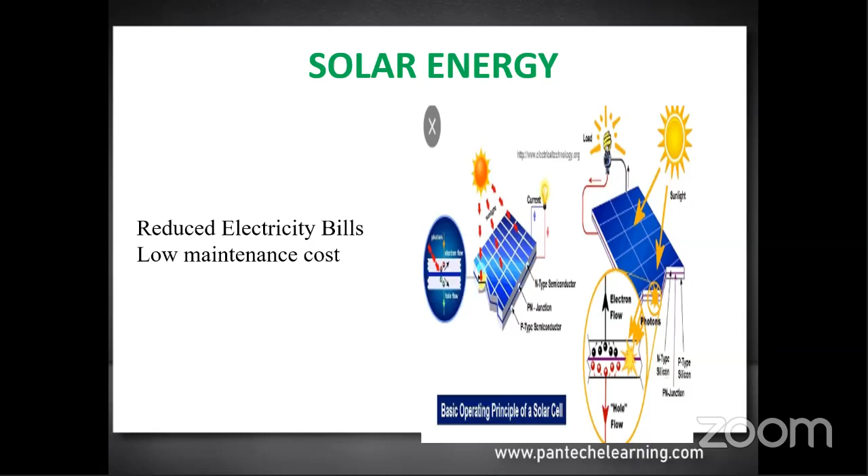So in solar energy, mainly two types are there: one is centralized grid connected PV system, and another is decentralized grid connected PV system. So what is centralized PV system and what is decentralized PV system?

Centralized PV system means, suppose in a big thermal power plant we are generating an 800 megawatt power plant. If you observe RTPP, Rayalaseema Thermal Power Plant in Kadapa - near Proddatur we have one RTPP, and Vijayawada also has one thermal power plant, right? We generate 200 or 300 megawatt power from that power plant.

Like that, when you generate a huge amount of power, like a 100 megawatt power plant in a big solar park - if you consider near Visakhapatnam, we also have one big solar park. And in Kurnool district, 3 years back, a 1000 megawatt solar PV plant was already proposed.

In India recently, the Prime Minister of India started a big 750 megawatt solar PV park in Madhya Pradesh recently. So like that, in a big solar park...

How we create this solar park - we can take 1000 acres or 100 acres. In that 100 acres, we put the solar PV panels in series and parallel, connecting them to create a big solar park, and from that solar park we can generate solar power.

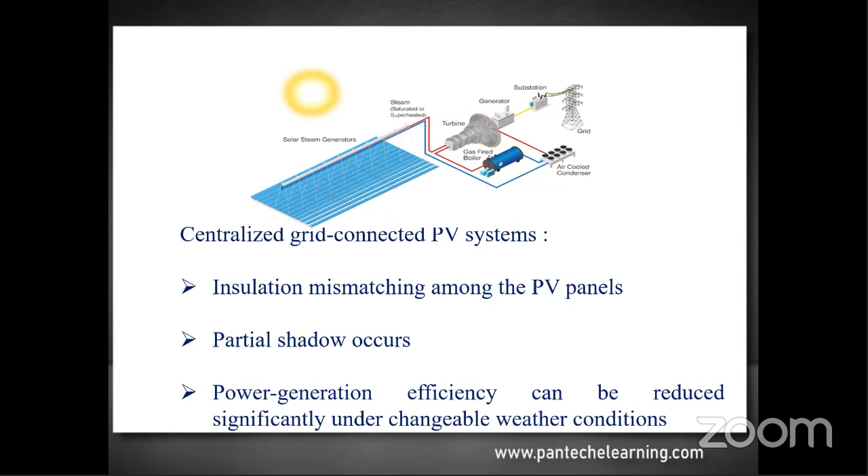When you create a big solar park, due to these problems - insulation mismatching problem, shadow problem, or weather conditions - the efficiency you get at the load side from the solar PV plant will be reduced. So then how to overcome those problems?

The solution is we need to prepare a decentralized PV system. That means you people know how much power you are utilizing. In Rajam, on top of our college also, how much energy we are consuming per month, we will know, right? Whether we are utilizing 10 kilowatt of power or 15 kilowatt of power, we will know, according to the estimation of power, how much we are utilizing per month.

So by taking those estimations, we can install a 10 kilowatt solar PV system on top of our college, meaning we no need to depend upon the grid side people. Where we are taking the power supply near to the substation only, whether our college or our home, we are taking the power supply, right?

So then, when you are connecting like this, when you are taking the power supply from the substation, in this case you no need to depend upon the grid side people. So here what will happen, you need to prefer the decentralized system like this.

The Andhra government is also preferring this, right? We no need to focus on the centralized capital; we are shifting to the decentralized capital, right? So in the centralized system, we face some problems - voltage problem, shadow problem - and the efficiency we get is very less.

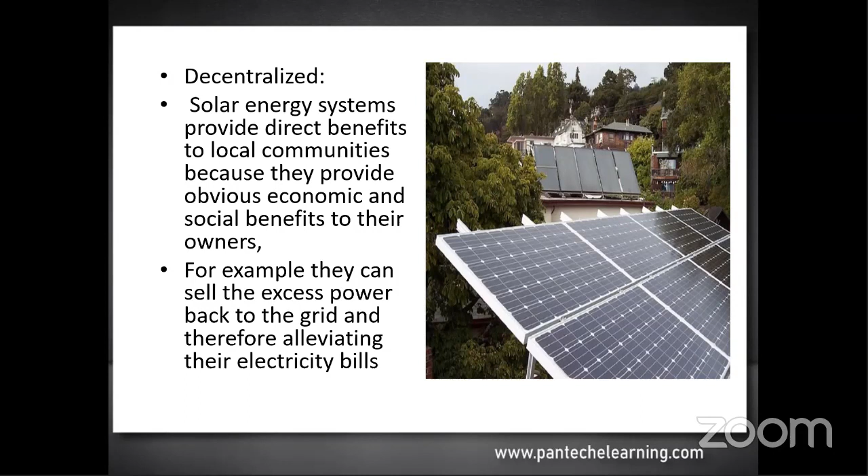So all the loads at your home, by using a 3 kilowatt panel, you are utilizing all the loads, and this power you are getting from sunlight only. Automatically, what will happen is it will reduce the electricity bill, right? If you consider when we were in lockdown for 3 months, after that the electricity bill became very huge, right? So they are changing the tariff plans and increasing the electricity bill.

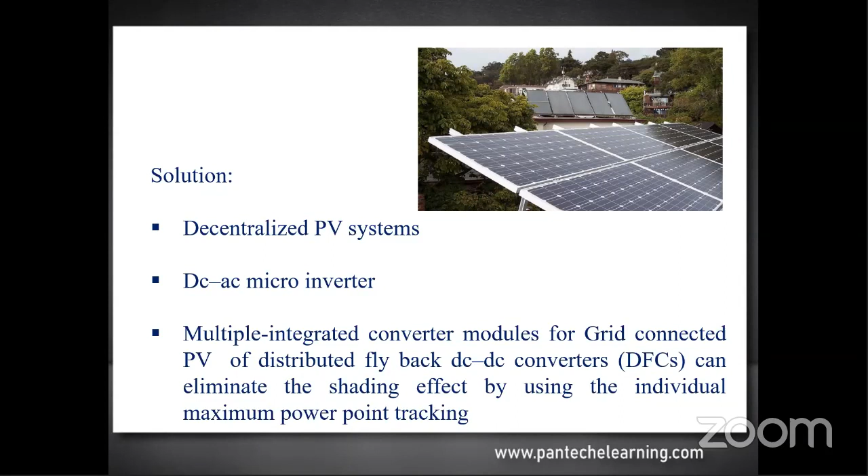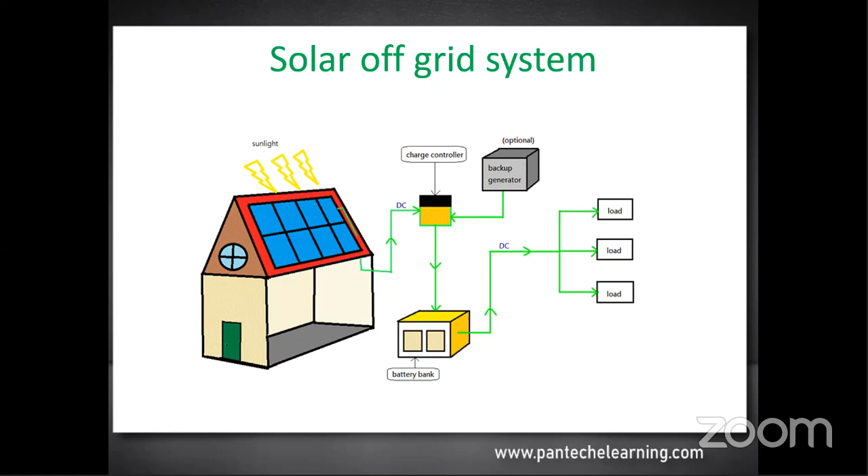Why we are calling this an off-grid system is because we are generating the power, and the excess power we are storing in the battery only. We are storing the energy in the battery. When you are combinedly using two energy sources, you can call it a hybrid system. So when you are preferring solar and wind, two energy sources, it is called a hybrid system.

So if you are preferring the grid tied system, as I said previously, when you are generating 360 units of power per month, per day how much units will you get? 12 units you will get, right? We can't utilize all the loads at a time. So one day we can utilize 8 units of power, another day 6 units of power. When you have excess power, you can give it to the grid side people.

That means the distribution side people will pay the electricity bill to you according to the unit cost. In India, the rural cost is different from the urban area cost. In Visakhapatnam, the unit cost may be different, and in rural areas like Rajam and surrounding areas, the unit cost may be different, around 3 rupees. In Visakhapatnam, the unit cost may be 9 rupees or 7 rupees they will purchase. So depending upon the location, the cost of power will also be different.

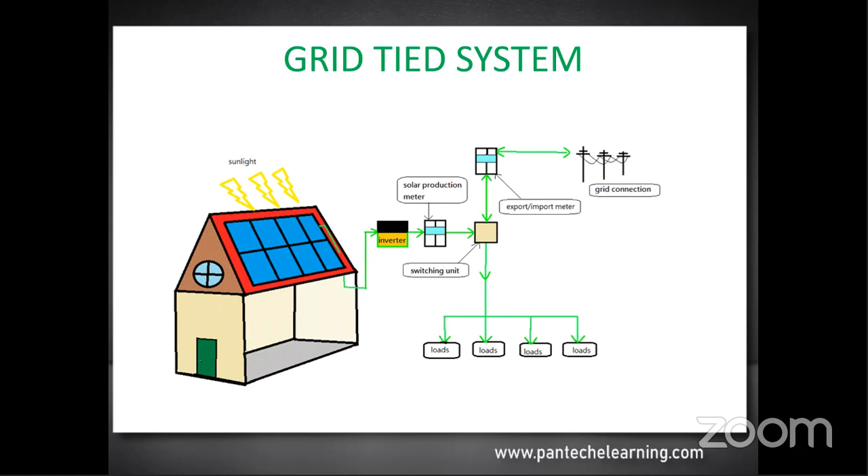Voltage and reactive power control, and power quality, mainly power quality, and some fault ride-through capability. So when we are transmitting the power, due to the heavy rainy season, due to lightning strikes, or trees falling down on the transmission network, automatically some faults will occur. So those faults we need to clear automatically.

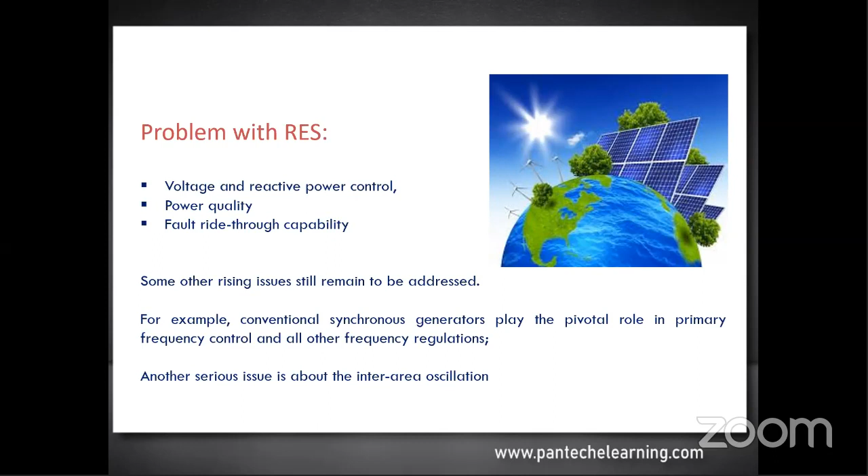We need to clear them, then distribute the power clearly, and then we need to satisfy the customer mainly. So how can we overcome these problems? How to design this solar PV system in MATLAB. So we are discussing some problems, whether it is a power quality problem, voltage mismatching problem, or any fault ride-through capability problem.

When we face these many problems while installing the solar PV system, the temperature from morning to evening is different, right? So we will get different types of voltage. If you are giving different voltages to your load side, people will not be satisfied. Definitely they won't take power from you next time. So we need to satisfy the customer. We need to give quality power to the load side.

Suppose every day we are getting continuous power supply. If the power supply is not continuous, people will feel annoyed. Automatically we will get some hesitation toward the grid side people, and we can hardly speak up. So we need to give quality power supply and continuous power supply also, that is the main thing. So how to give continuous power supply to overcome all these problems? Here, MPPT comes in.

What is MPPT? Maximum Power Point Tracking. When we are installing the solar PV system on top of our home, we need to go with the MPPT algorithm. This is nothing but the charge controller. Whatever the weather conditions, whatever the atmospheric conditions, by implementing the maximum power point tracking algorithm, we can tackle it so that at a particular point only we will get the maximum power. From that point only, we need to track the PV power.

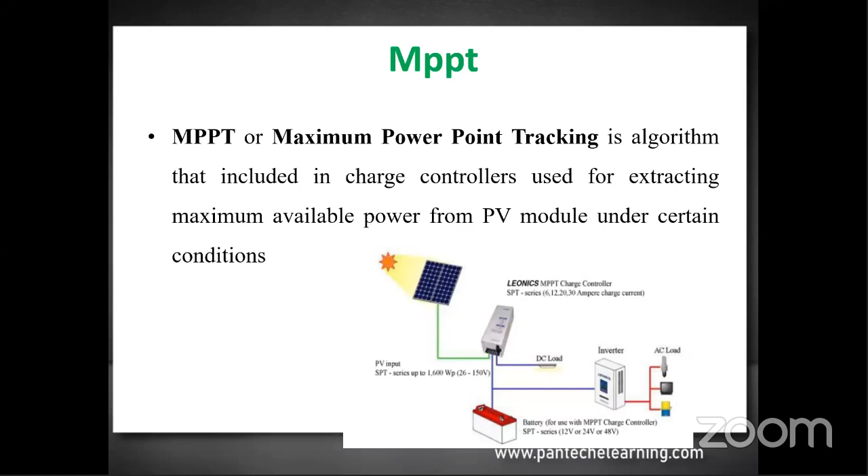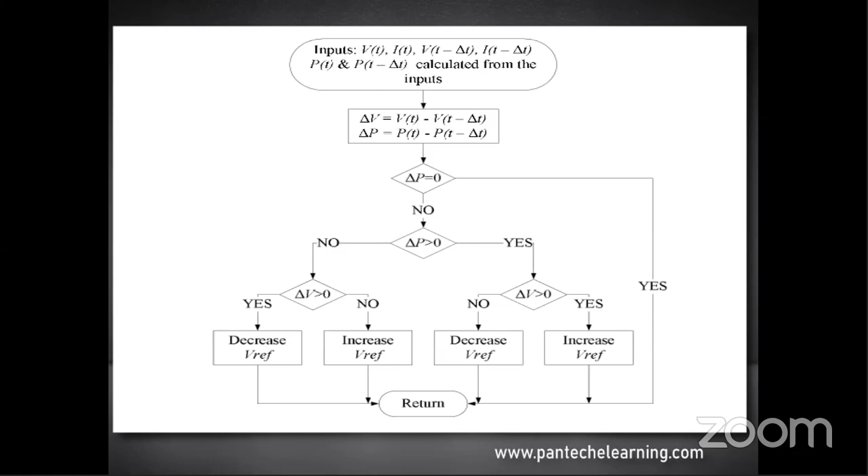So here is the basic MPPT algorithm, you can see here. The temperature automatically, minute to minute, may be different, right? So according to this MPPT algorithm flow chart, we can tackle and track the maximum power. So where can we utilize this, how to design these things? The best platform among all the industry people is MATLAB.

MATLAB is not only for physics area, it has some good features. In the MATLAB domain, we can design the physical model of a solar PV system. This physical model, it is not a programming language—you need to remember MATLAB is not a programming language, it is a matrix laboratory. If we are strong in mathematical analysis, we can design all our models in the Simulink design also.

Cleve Moler developed MATLAB, especially for engineering and research scientists, for their purpose only it was introduced. Before MATLAB, we had Fortran language, and C++ and C languages. For technical people and scientists to understand these, it was so much difficult, they faced so many problems. So MATLAB was introduced, and by analyzing all the mathematical problems, we can solve our problem here.

In the MATLAB domain, we mainly have four steps: one is model in the loop, another is software in the loop, another is processor in the loop, and another is hardware in the loop. So we have mainly these steps. Here we need to design the physical model first.

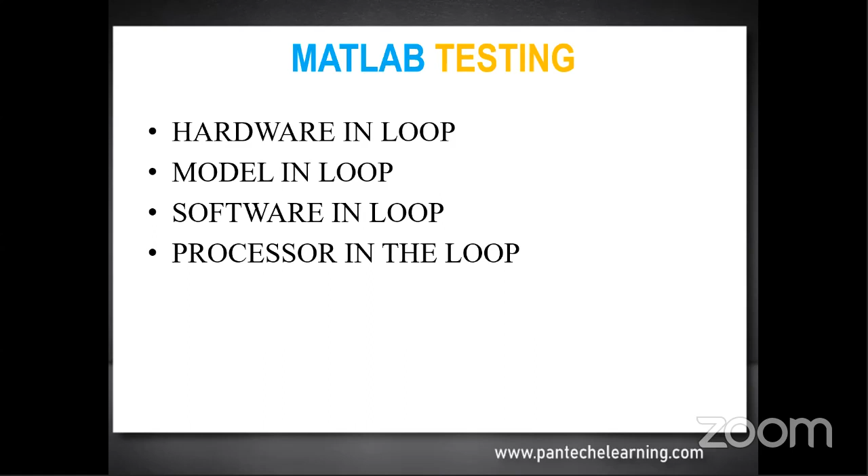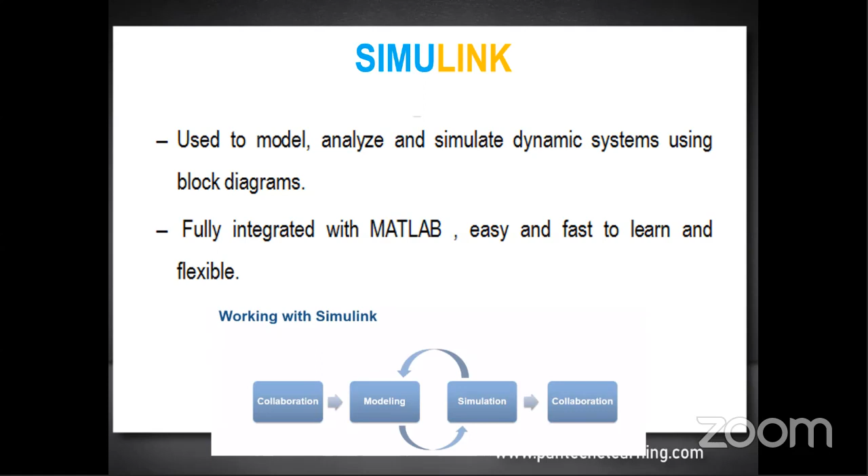And these are the models. So here, how to design a physical model in Simulink and Simscape. By using Simulink and Simscape, we need to implement this to analyze a dynamic system. This Simulink is the best tool for that. And here, model in the loop we can test, and how many test cases also we can write in the model in the loop.

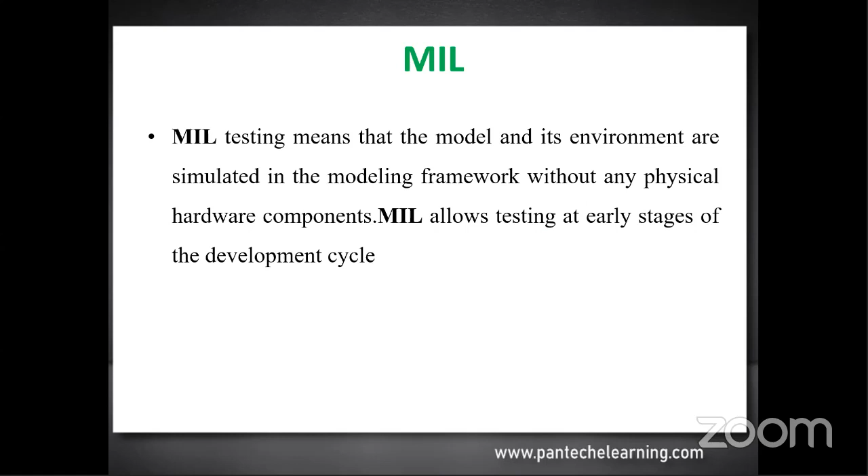Here I will show the MATLAB. I am using the 2016A MATLAB version only.

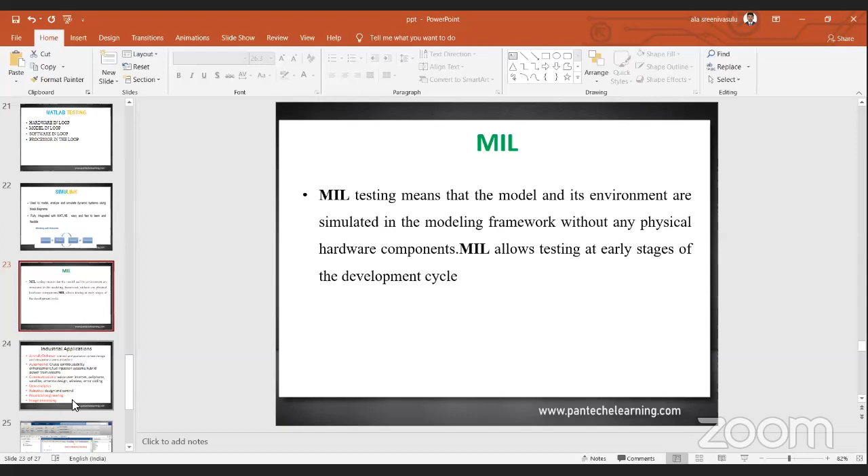Not only for solar PV systems, we can utilize this MATLAB in industrial areas, aircraft or defense or automotive industry, communication, data analytics, financial engineering, image processing, and robotics also. And here I will show the MATLAB domain.

You can observe here. You can see here, this is the MATLAB command window. So in this MATLAB command window, whatever variables you are typing here, all the variables will appear in the workspace.

Here I will show a simple model. Normally, the variable name, how much we can give here, whatever the variable is. Suppose if you are typing in this command window, if you are typing A is equal to any matrix, you can type here.

A is equal to 1, 2, 3, semicolon, 4, 5, 6. Then you can enter here. So whatever variables you are typing in the command window, it will appear in the workspace here.

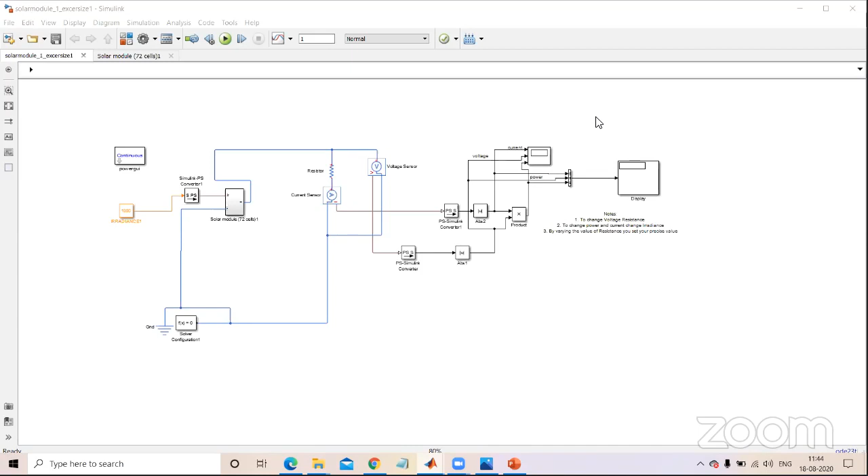So in this MATLAB Simulink, we will see a basic model. This is a solar module exercise where I connected 72 cells in the solar PV module. We will see how to connect the cells in a series manner. This is the solar module PV system.

I will show each cell. Inside, we created one subsystem. What does subsystem mean? To reduce the space in this MATLAB window, we created the subsystem. You can see here.

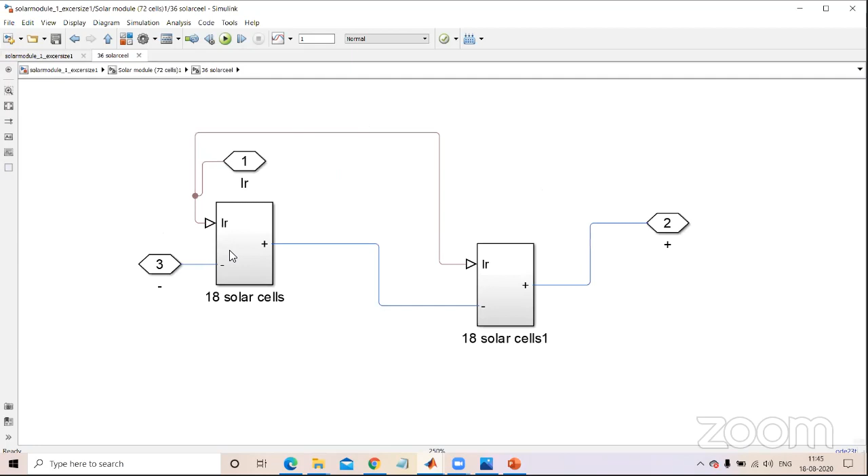If you are observing here, we connected a number of cells - how many? 1, 2, 3, 4, 5, 6 solar cells we connected.

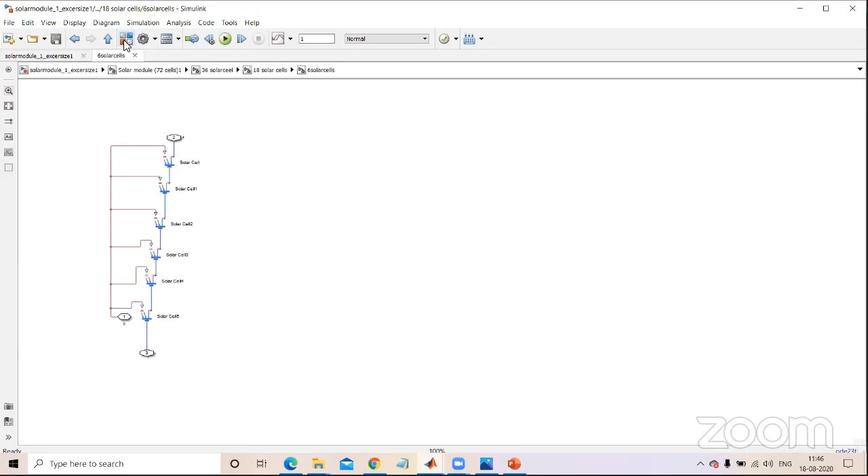Where can we get these solar cells? From the library. This is the library browser, and in it we have different toolboxes - in MATLAB, more than 100 toolboxes are there. We can implement this solar PV system by using Simulink and Simscape, and we can implement this solar module PV system also.

This is the library browser. These are the commonly used blocks - continuous, dashboard, and different types of blocks are there. From Simscape, you can get the solar PV system. Otherwise, if you know the name solar cell, we have a search box here - you can type 'solar cell' here.

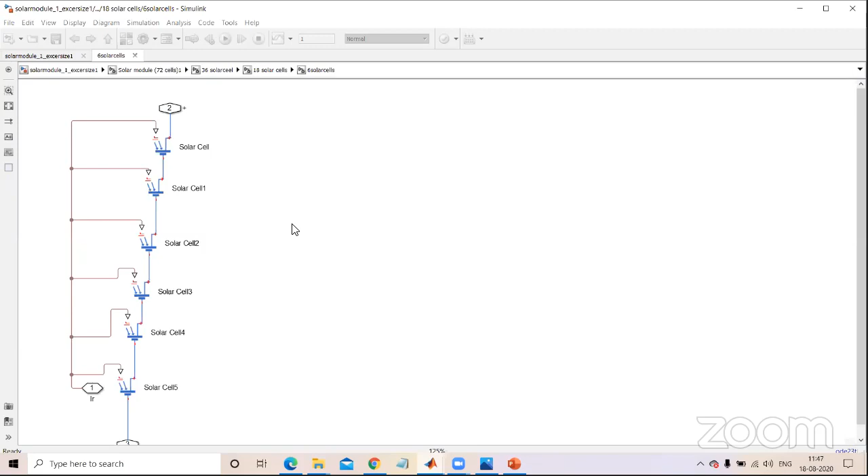You can see here, this is a solar cell. To add it to our model, just right click and add to block in your solar module model. By connecting the module, you can see we added the solar module PV cell - from the library we are taking this solar cell.

If you observe this solar cell, how many terminals are there? 3 terminals - one is the positive terminal, one is the negative terminal, and one is the irradiation block. This triangular shape is the irradiation block, because in real time we don't know how much irradiation or temperature we are getting from the sun's power.

So here in the Simulink software tool, we need to give the irradiation temperature, whether it is 1000 irradiation temperature, or 800 irradiation temperature, or 500 irradiation temperature. Different types of irradiation temperatures we can give here.

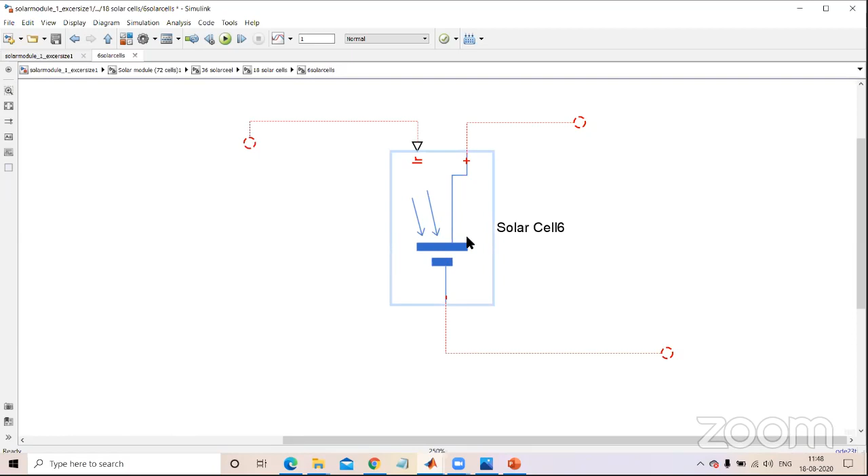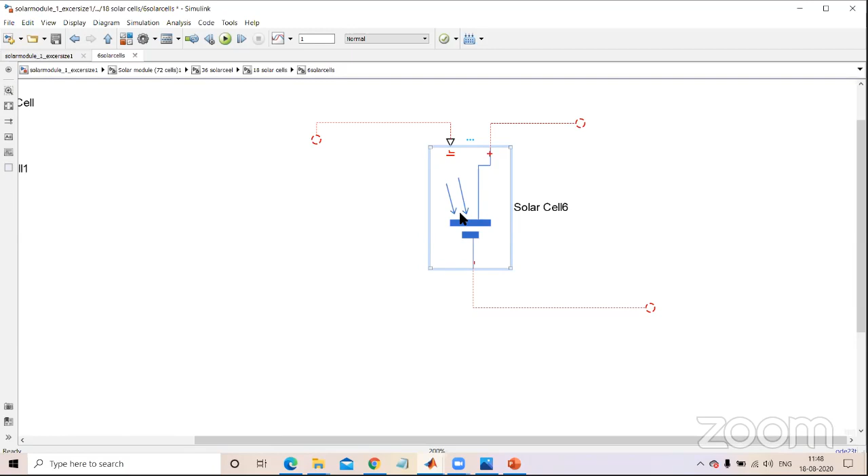So here, this is a physical block. This is a Simulink physical block only. In this physical block, if you are observing, this block is also MathWorks providing. If you double click in this solar PV cell, in each cell we have only 0.6 voltage.

So here Matlab library browser, we have 0.6 solar cell at 1000 irradiation temperature. So then we know, right, how much wattage of the panel we need to implement. So if you are observing this block solar cell parameters, if you observe here.

You can see here, what is the short circuit current they given? 7.34 they given. And the open circuit voltage they given here, 0.6 open circuit voltage they given. And the irradiation temperature they given here, 1000 irradiation temperature they given.

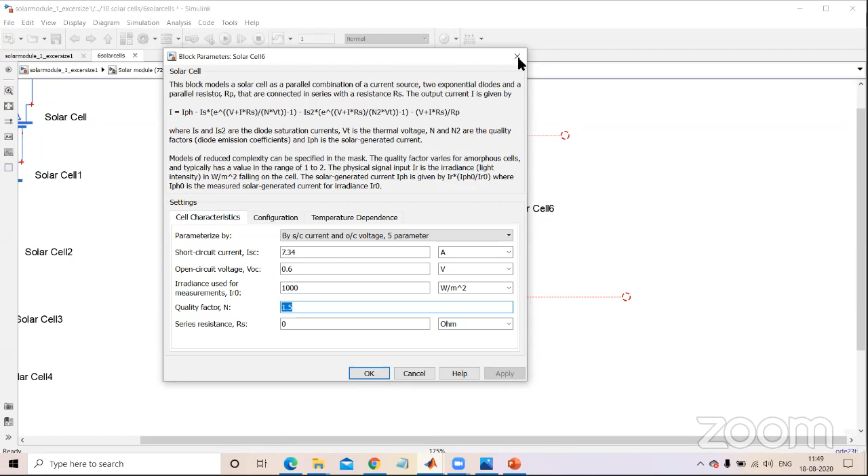And the quality factor here, 1.5 they given, right? So here this block is providing by the MathWorks. So from the library browser we can take, right? So here, like this cell only we are taking, but here, how much each cell, you can observe here, in this cell.

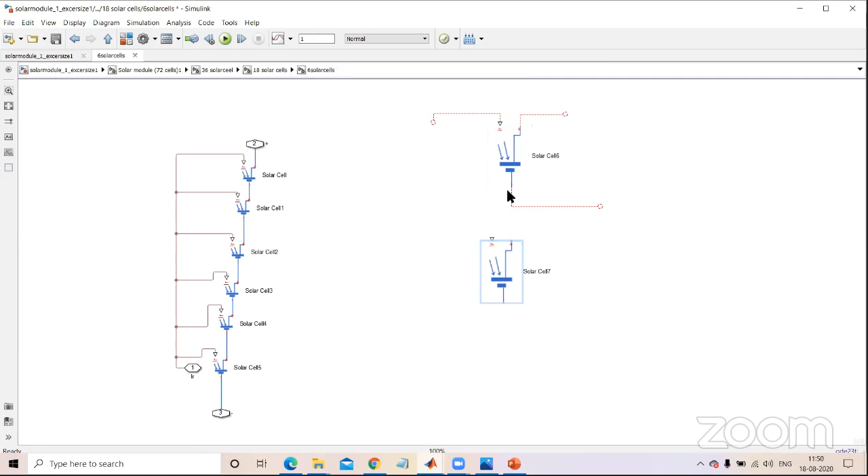So how to connect the series means, you can observe here, I will show here. So here, just once if you take the one solar cell means, so then you can take here another solar cell. So here, by taking the solar cell, series connection means how we need to connect. So positive, negative I connected.

And here again, so why here I am connecting number of solar cells in series means, to improve the voltage levels. So when we have one panel, one cell, here it is giving 0.6 only. When we need to improve, when we need to connect the number of cells in series manner only, we can improve the voltage levels, right? So by connecting a number of cells in series manner, we can improve the voltage level.

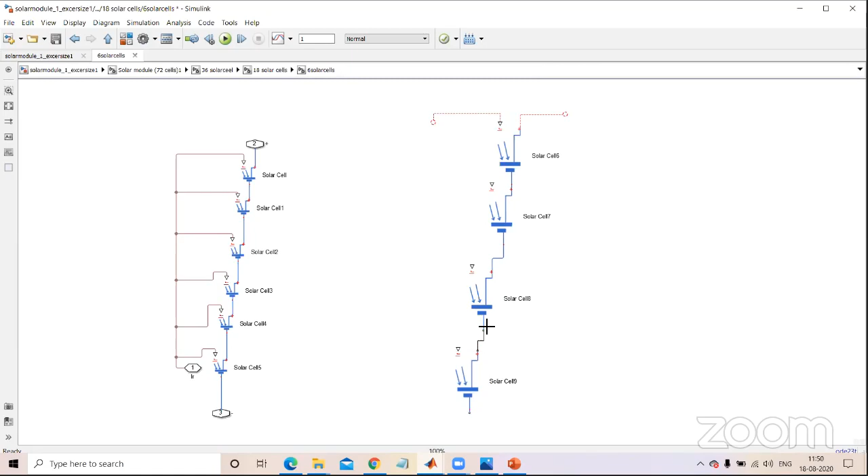So here, all the cells here, what I am doing here, by connecting the series manner, so here positive, negative, I connected. So here the space it is occupying, right? More space it is occupying, right?

So here like this, when it happened means, you can select all these blocks. You can select all these blocks like this. So then just right click here. On the Simulink software, you can just right click. Once you need to select all these 4 solar cells, you can right click here.

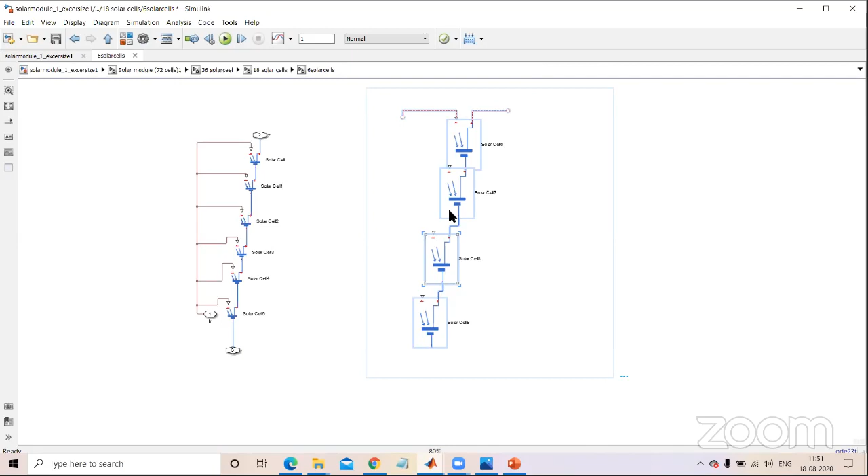Once if you right click here means, you will get one pop-up here. You will get one pop-up. Here it is showing like this, right? So cut or copy or delete or create subsystem from the selection.

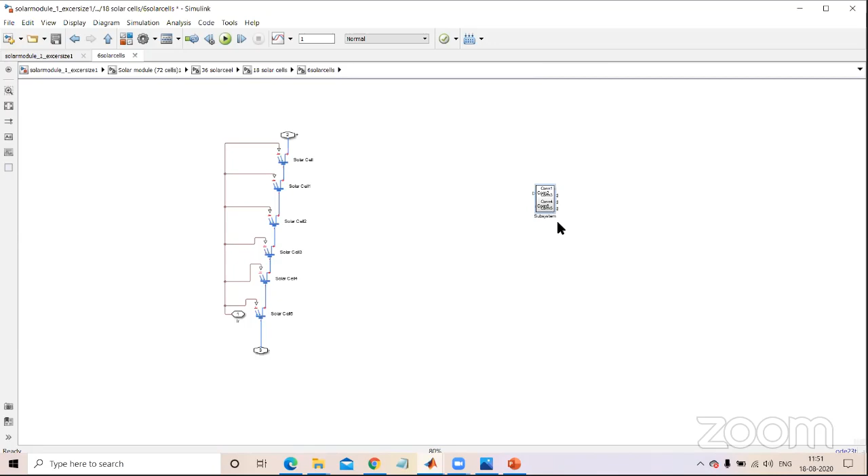That means Control G you can put here. So here we are creating the Control G. That means the space, it will be reduced very less, right? You can observe here, space is reducing. So here, the number of ports here, it is more, right?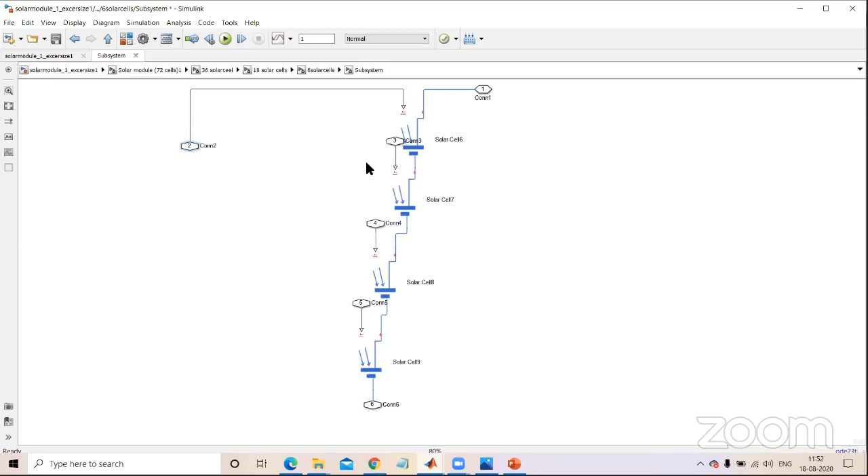So how to connect here? So inside of the subsystem, this connection port 2, this is the connection port 2, right? So what is this one? In the solar PV model, 4 cells we connected, right? So for understanding purpose, I am telling.

So this is, we need to give the name IRR, or you can give the name irradiance. Irradiance, you can give the name. So this input port, you can give the name irradiance. Second one. And here, this third one is there, right?

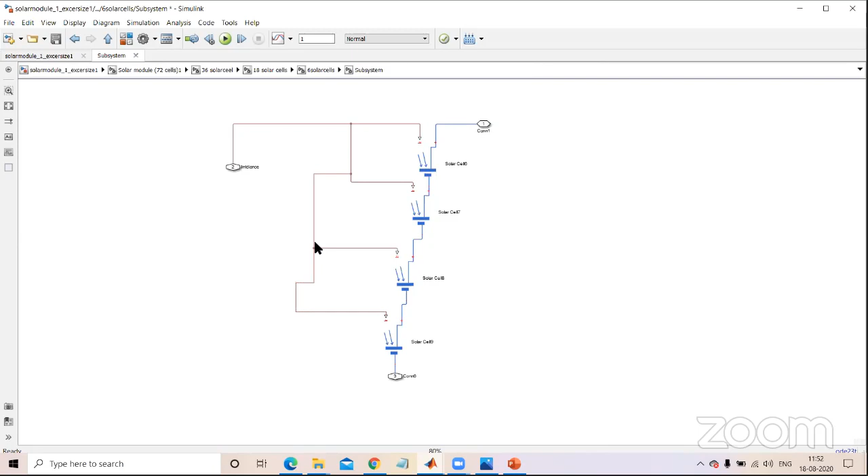You can remove this one and you just give this connection to here. You just give the connection to here. You can observe here. You can connect here and you can remove this one. You can connect here. And this one is the positive terminal. This is the positive terminal. This is positive.

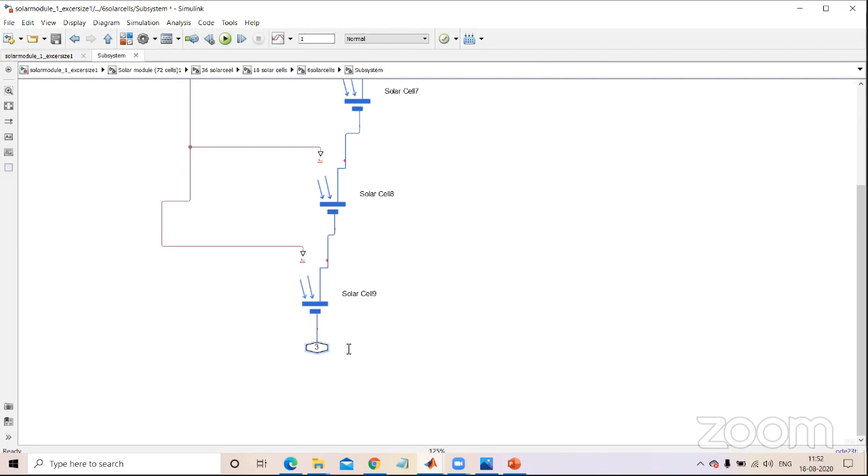Negative. This is negative. Negatives, right? So if you come back here, it is reducing, right? So we have three ports only. One is irradiance and one is the positive terminal and another one is the negative terminal, right?

So here like this, we connected here. How many cells we connected here? Number of cells we connected here. 6 solar cells we connected. This is for understanding purpose. You can observe here. How many solar cells are there? Each cell here, you can observe here.

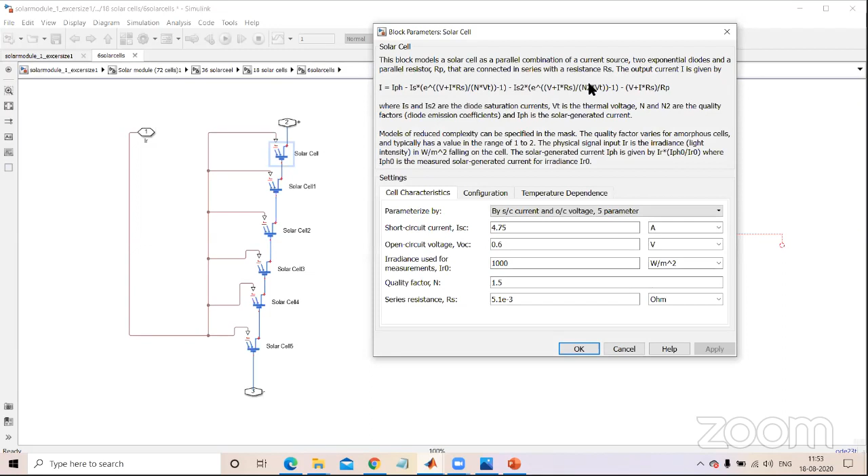So here in this solar cell, we connected the series resistance we given. We need to transmit the power, right? We are converting the photovoltaic energy into electricity we are converting. So here the series resistance is 5.1 e power minus 3. And here each cell it will give 0.6 voltage. And what is the short circuit current?

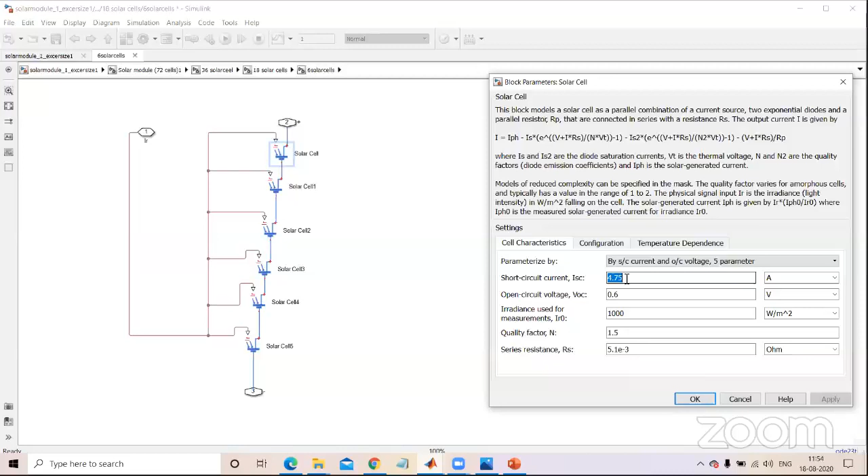4.75 only we are, that means current is 4 amps. And the voltage, one cell will give 0.6 voltage only. So how many cells did we connect? Total number of cells, 6 cells we connected.

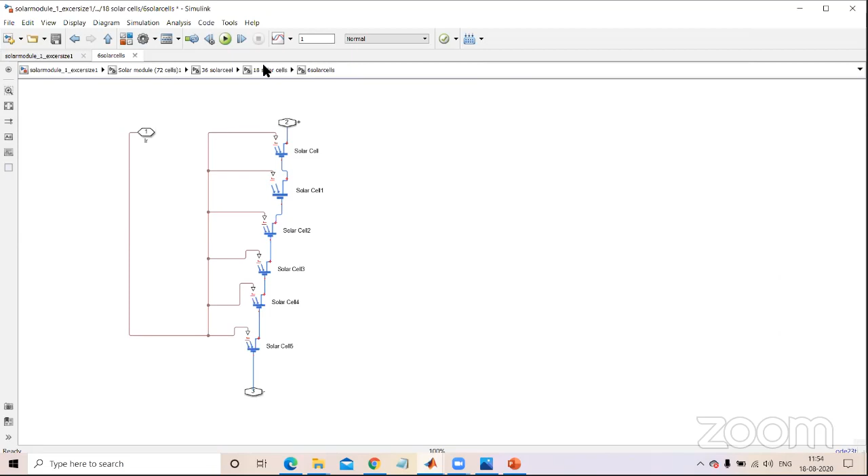By connecting the cells, we created one subsystem here. So I am removing this one. By connecting this series connection, I created a subsystem. Again, these solar cells, this is the irradiation, this is the negative terminal, and this one is the positive terminal. So this is one solar PV module, right?

So like this, I connected 3 more solar cells. From here you can drag here. So again, this is 6 solar cells and this one is 6 solar cells. Total cells, how many? 18 cells it will come, right? Again here we connected in series manner only, positive to negative we connected. And here this is the positive, and this irradiation block we connected to here.

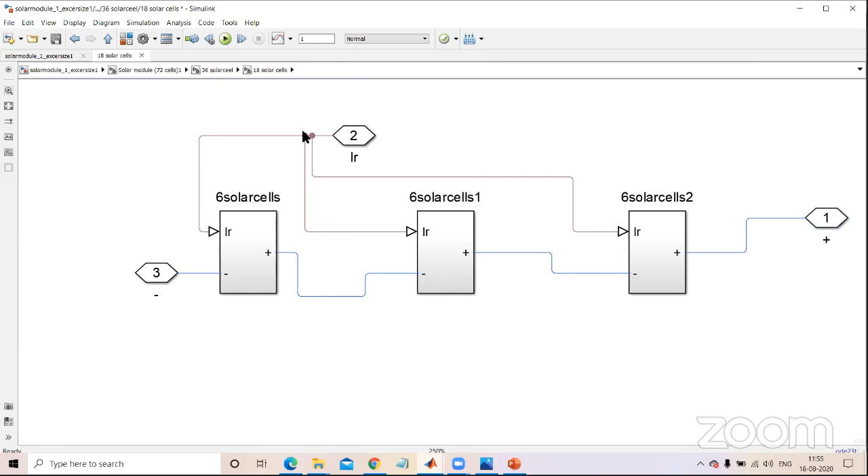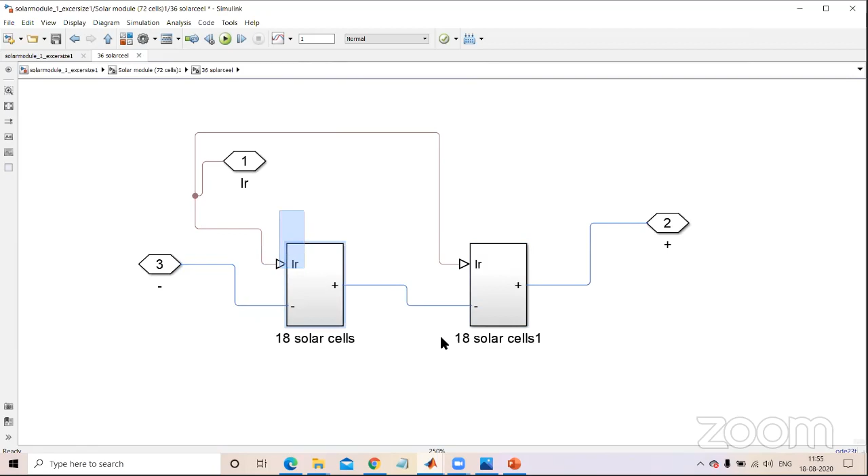So if you observe these cells, how many are connected in series? 18 cells are connected in series, but 6 solar cells is one module, one solar PV module. Like that, here again, 18 solar cells and 18 solar cells, we connected 2 such groups. Totally how many cells will we get? 36 cells we connected, right?

So then here you can see 36 solar cells and 36 solar cells, we are taking 2 different solar cell groups. We are taking totally 72 cells for one solar PV module. How many cells do we have? This is one total solar PV module which has 72 cells inside.

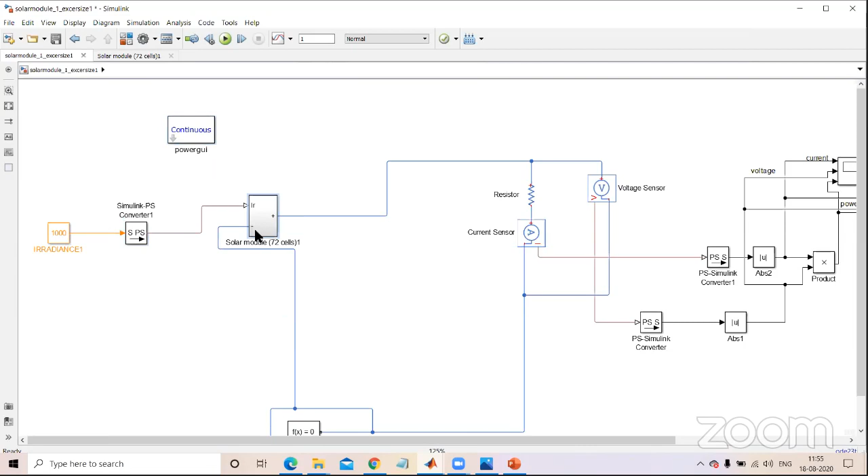If you observe our mobile battery, in the mobile battery also we have a number of cells. So according to the cells connected, the battery capacity may be different. Here we connected one cell of 0.6, and like that we connected 72 cells, with a resistance of 5.15 e power minus 3, a very low resistance.

So after this we need to give the irradiation block, right? So again, from the library we are taking the Simulink to physical converter from the utilities. From the utilities, we have one Simulink to physical converter, and physical to Simulink converter. Why are we connecting the Simulink to physical converter? Because this constant block, if you observe here, this is a constant block, right?

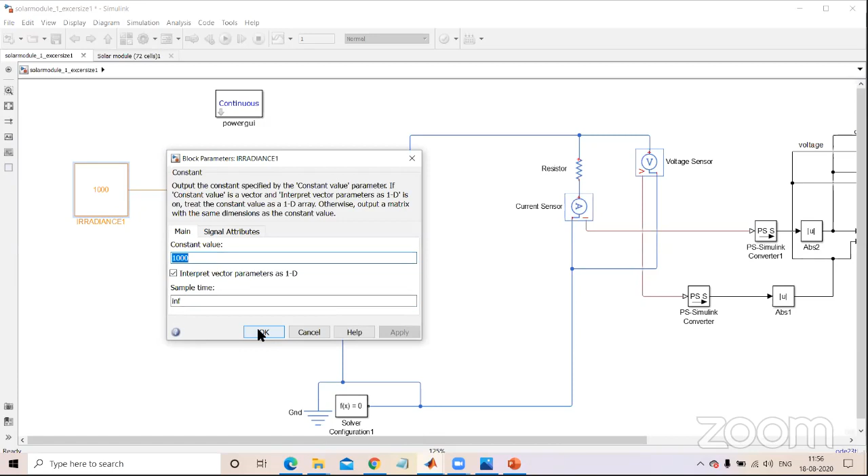In this constant block, how much irradiation temperature did I give? 1000 irradiation temperature I gave. But this is a Simulink block, right? This is a Simulink block. But in real time, the solar PV panel directly takes the physical signal from the sunlight. So here I am converting this Simulink signal to the physical model. You can observe here, this is the Simulink to physical converter.

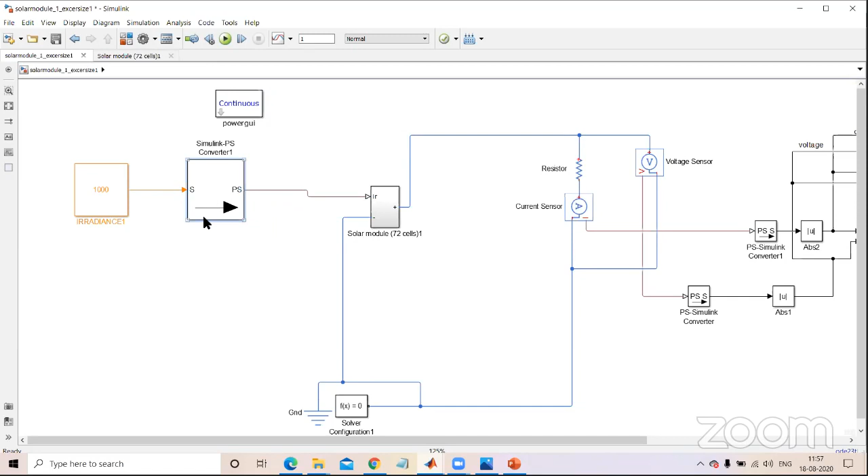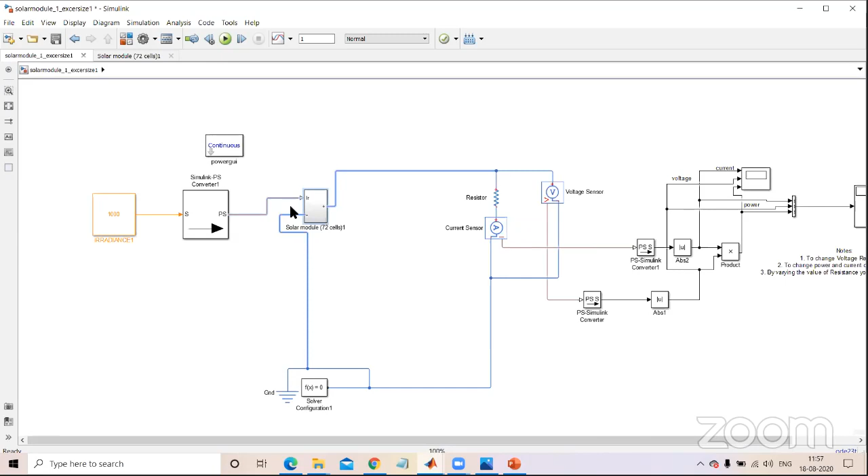So by converting the Simulink signal into the physical signal here, then to identify how much wattage this solar PV module gives, what voltage we are getting from it, and how much current we can get, we need to take two sensors: one voltage sensor and one current sensor. This is the voltage sensor and the current sensor. Voltage sensor positive I connected here, and the current sensor negative part we connected here.

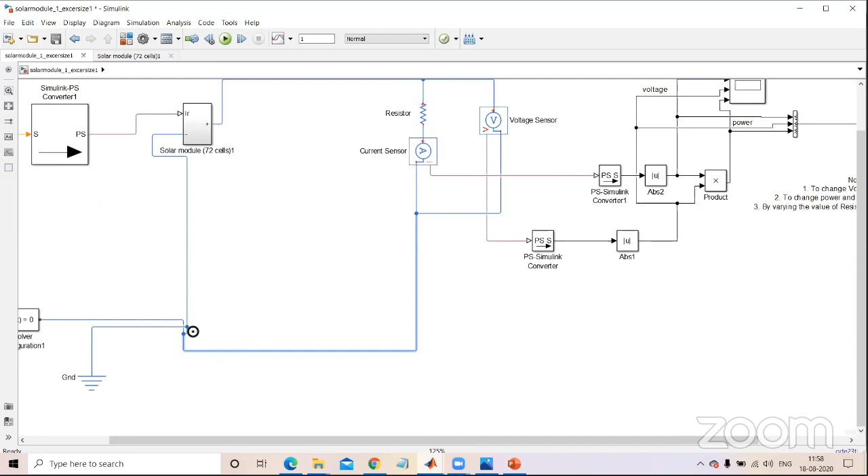And here this electrical reference and the solver configuration, we need to take whenever we are working with Simulink and physical models. At that point we need the solver configuration, meaning linear or non-linear differential equation. If you observe this solar cell also, in that solar cell one diode, one resistor, and one current source will be there, connected in parallel. From that only we can generate the solar PV current and voltage from the solar cell.

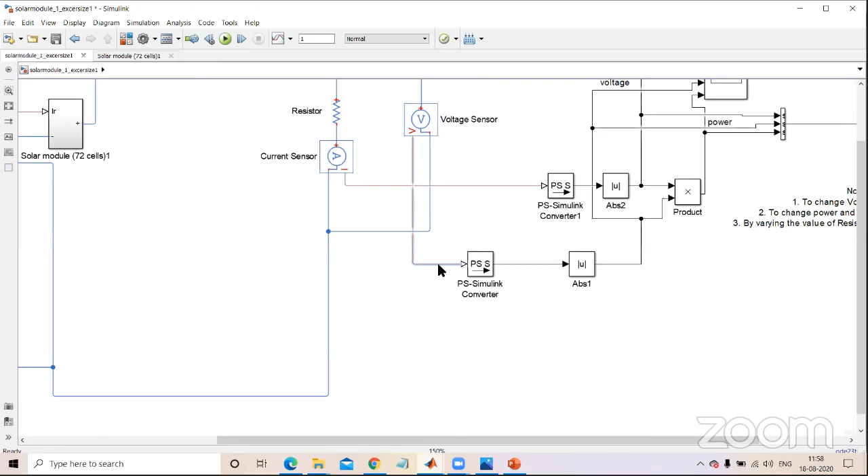Again here, in this current sensor, we connected one physical to Simulink converter. So this is for the display in real time hardware, meaning we can observe in the CRO or DSO, we can observe the waveforms.

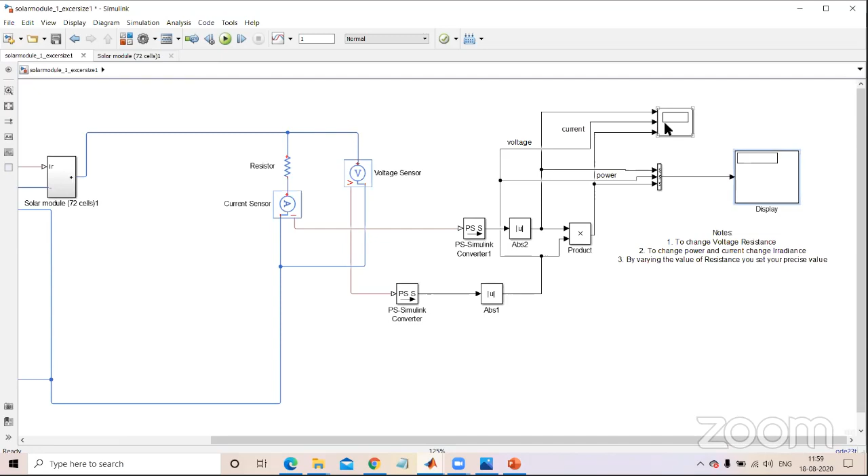To observe, here we connected one display. In the display we can observe what is the voltage, what is the current, what is the power, and here we can see the waveforms also.

Here I connect and multiply the voltage and current by using a product block from the library, so we will get the power here. So here I am running the model. You can observe here, so here you can run the model.

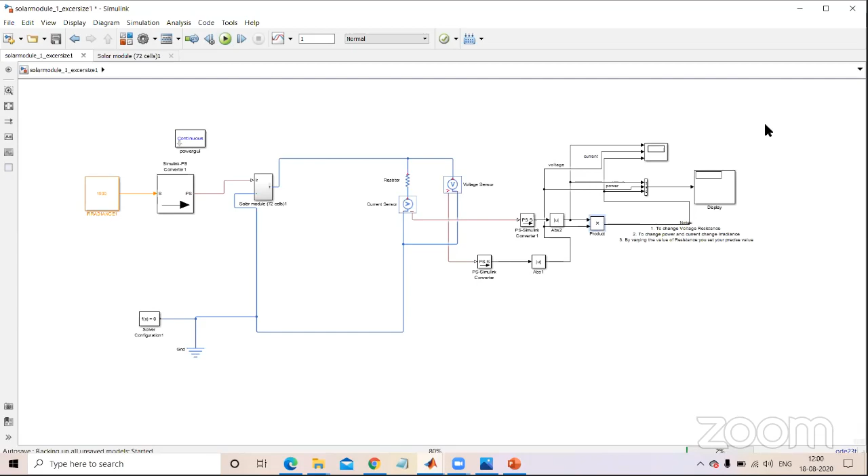Here we need to run the model, this one. So it is compiling. Once it is compiling, the simulation will be started. Here we are giving the running time one only, so it will take less time only here.

Here, if you are observing, we didn't write any mathematical formulas, we didn't write any programming. It is a design, a physical model or design only. If you know the mathematics, so how much wattage we need to implement and what is the rating of the PV panel we need to implement, according to that we can design here.

Already some companies are giving the data sheet also. You can directly take the solar PV panel, and from that solar PV panel you can select any data sheet, whether it is TSM solar PV or Suntech Power or any other companies, different types of solar PV companies provide some data sheet. According to that data sheet, you can implement your model also.

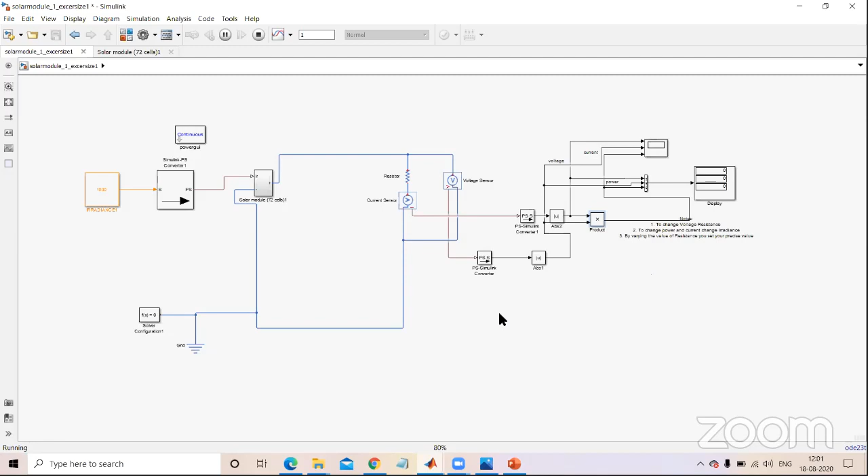So you can observe here, it is running here. Just a minute. Yeah, you can see here in this solar PV module.

So what is the current we are getting? 4.75 is the current we are getting. From this, how much voltage we are getting? What is the open circuit voltage? 14.25. But how many cells are we connected? Number of cells, 72 cells, right? From that number of cells, 72 we are connected.

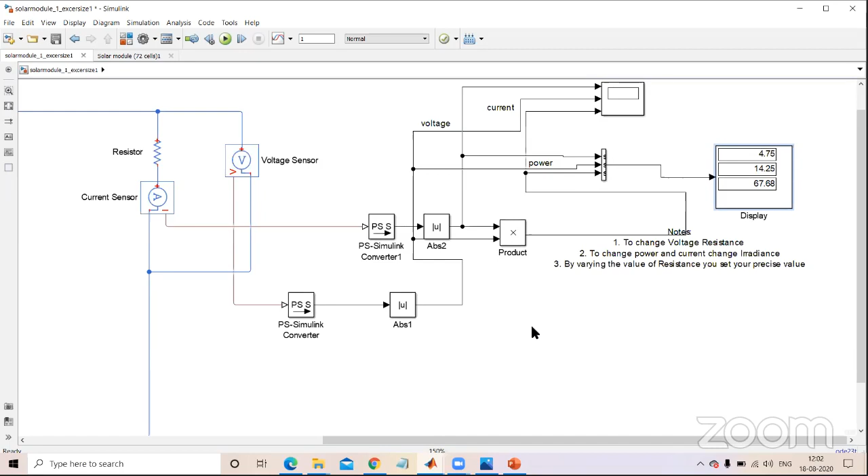But each cell will give 0.6 only, right? If you are observing, from that 72 cells we can consider 14.25 as the maximum voltage which we can generate from this solar PV module. This solar PV module gives 14.25 voltage, and the current is 4.75. The total power, by multiplying this voltage and current, we get 67 wattage. So this solar PV module is a 67 wattage PV module.

You can observe the graph also. DC means it is not a bidirectional power flow, it is a constant unidirectional power flow only. Unidirectional power flow, and here we need to maintain less distortions, voltage distortions.

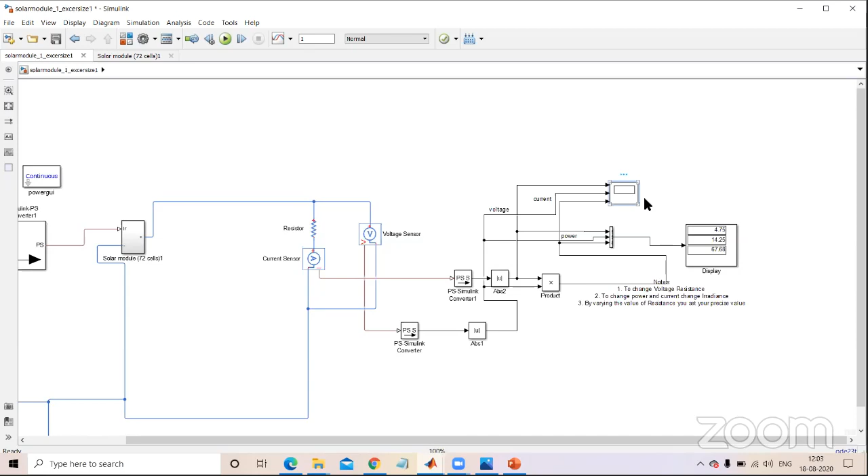If you are observing, when we get different temperatures in the atmosphere, if you people get voltage mismatching problems, voltage distortion in the DC voltage, if you are not getting constant DC voltage, and if that type of voltage levels or power is given to the load side, the load may be damaged within a short time. The long life of the product will be reduced.

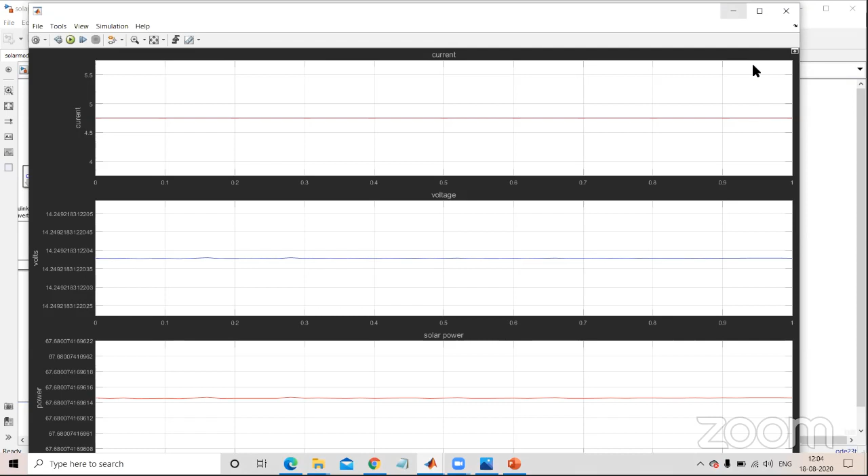You can observe here, this is the current, voltage, and power. So the DC voltage we are getting is constant DC voltage only, right? Constant DC voltage only, constant DC current only. So this DC we need to convert into AC, meaning we need to implement some devices, converter topologies. From that inverter we can convert this DC into AC supply. We can connect any load, whether it is a bulb or fan, and we can utilize that power. And here these are the solar cells.

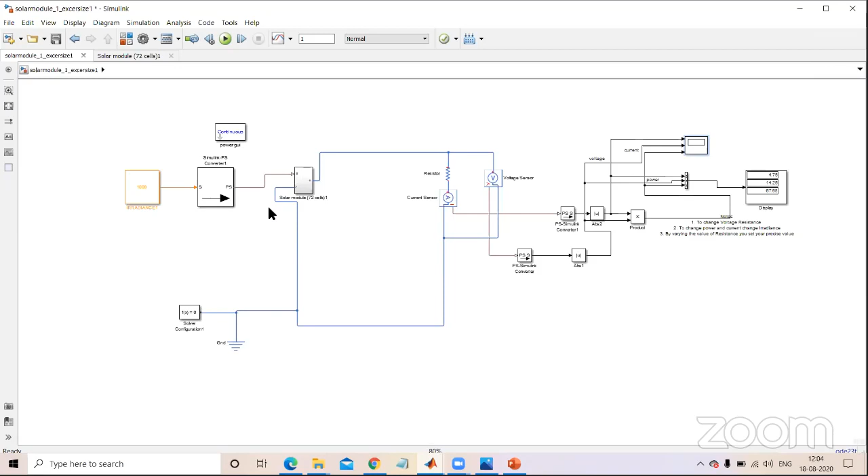If you are observing in the library, we have one solar PV panel also. So here you can observe, from the power system and specialized technology, and here the renewables.

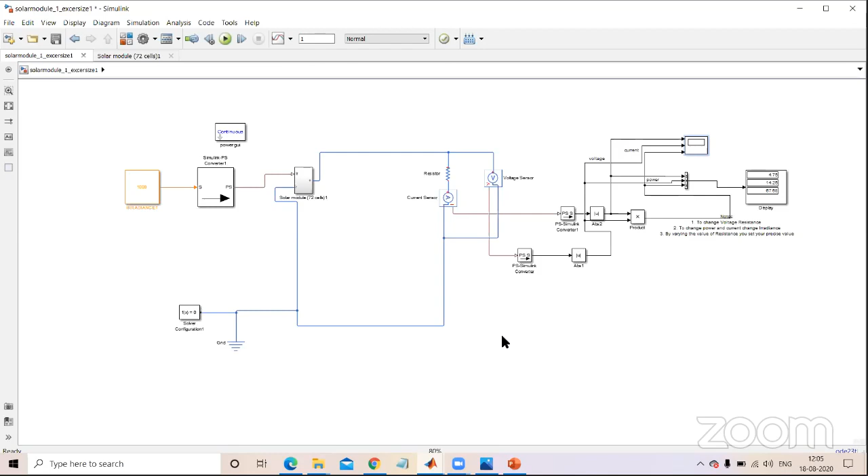You can observe here, as I said previously, in the Matlab domain we have directly solar PV module or photovoltaic module or solar module also, both are the same only. If you are observing this PV module, different types of companies are providing data sheets. A data sheet also we have, I will show that one. Then we can observe the voltage and current characteristics, and voltage and power characteristics also we can observe. You can observe this.

This is the one solar. So like this you can implement. You need to implement your own model, so this is a physical model. Suppose you know the mathematical details and you know what is the power, what is the wattage of the PV panel you need to implement. So directly you can take this PV array.

Here you can give the irradiation and temperature directly, whether you are following 25 degree or 35 degree temperature, also you can give here. If you double click on this PV array block, you can observe different types of data sheets we have.

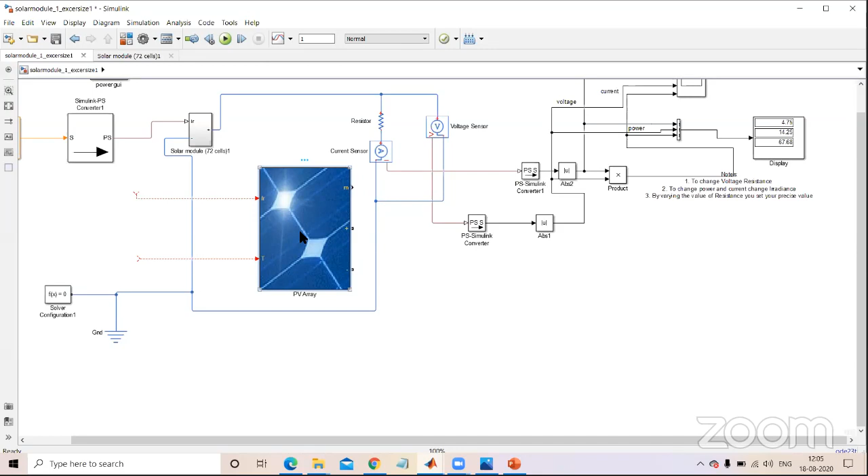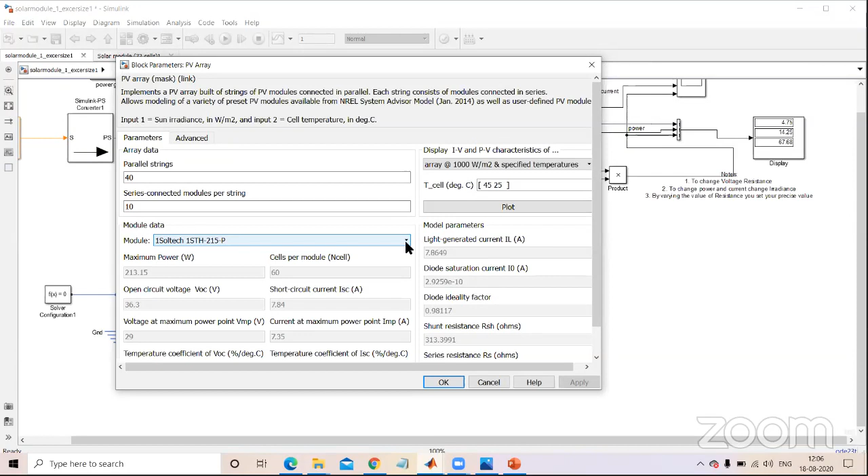You can observe here, this is the module data. If you observe here, Soltech, STH 215, and different type of companies, they are providing data sheets. From this, you can select any data sheet according to your model.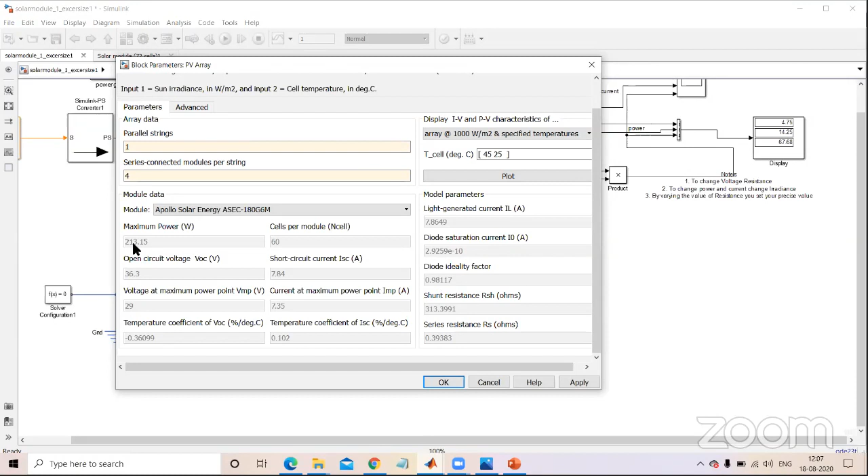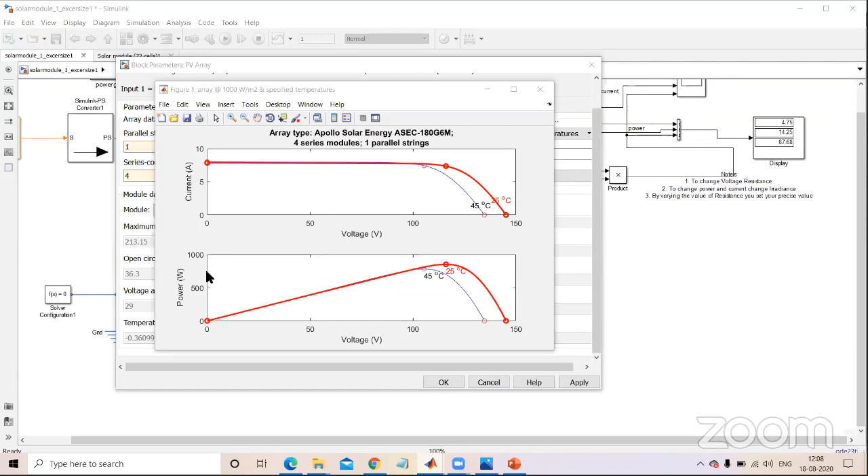In this PV module, if you select this data sheet, by connecting four solar PV panels in series and one parallel string, how much do we get? More than 8 amps you are getting, right? So from this, 800 watts of PV panel you can create here.

If you observe each panel, in real time also, compulsory they have what is the open circuit voltage and what is the maximum voltage we can generate. If you observe here, the open circuit voltage of the solar PV panel is 36.3. But what is the maximum voltage you can get? At the maximum power point, when we are implementing, 29 voltage only we can get here.

If you are observing the characteristics, the short circuit current or current at maximum power, you can see here the characteristics. So these are the characteristics according to the modules.

If you need to connect more modules, if you are implementing 8 modules and 2 parallel strings, at that time you can plot the graph, and it may be different. You can observe here how much the power is increasing, it is nearly 3.3 kilowatt of panel we can create from this solar cell data.

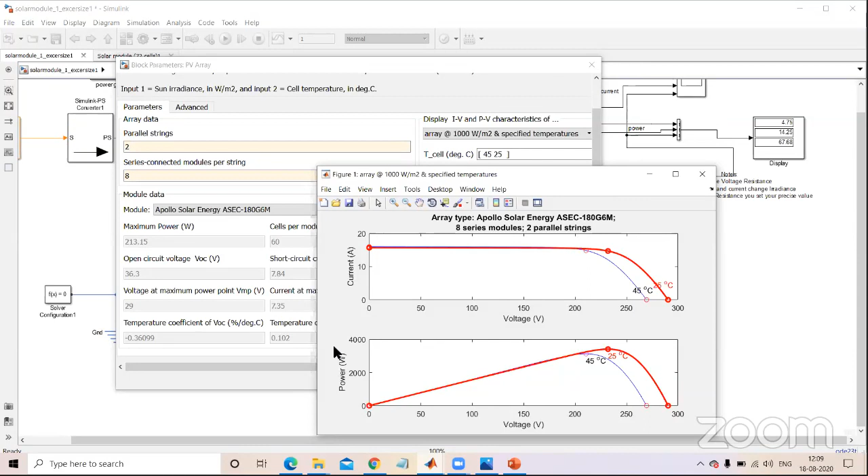We created 8 solar PV panels in series, 2 parallel strings, nearly 300 voltage, and current how much? 15 amps. So at 300 voltage, we can get almost 4 kilowatt of PV panel also, by using this data sheet, according to our requirement we can implement.